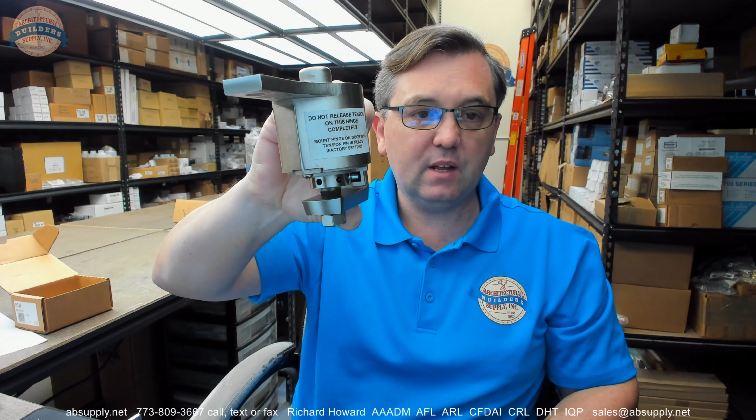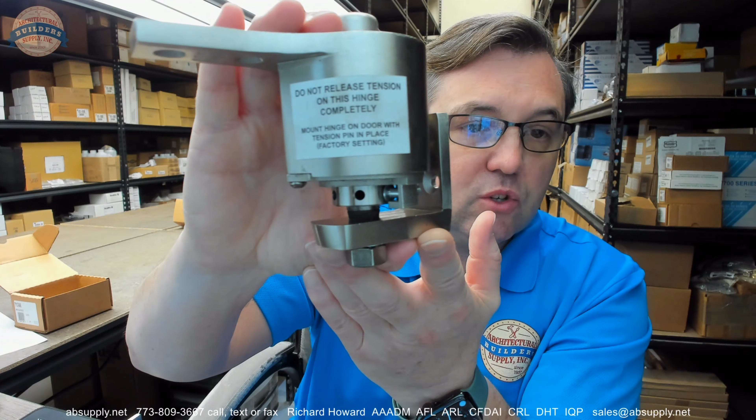The 7110 series from Bommer is a particular unit in that you would be best served by just literally following the installation instructions. Don't alter anything unless it's specifically stated, because this unit already comes out ready for setting tension after it's installed. Do not release tension on this hinge completely. Mount the hinge on the door with the tension pin in place at the factory setting.

So let's go over some basic dimensional properties of this item, and then we're going to get into the extended description of the item, meaning the installation instructions. So overall height of the top portion, overall height of the bottom portion to the jamb, about 2 1/4 inches, and its width about 1 1/4 inches. The overall height of the unit from what's called the boss all the way down to the bottom of the unit appears to be about 4 3/8 of an inch.

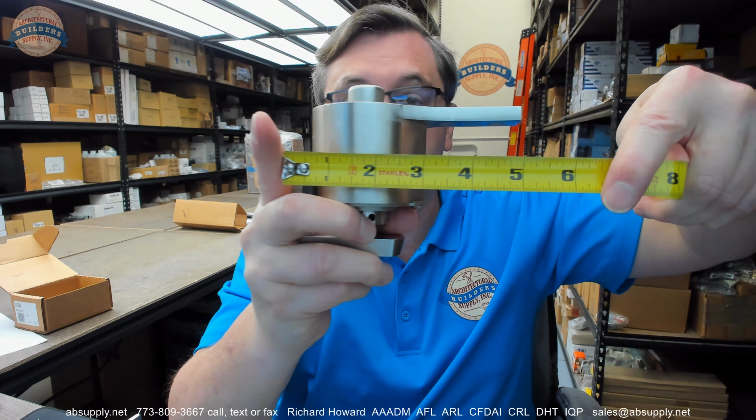So it's not small, plus it's not light—this weighs over 3.5 pounds. Overall width is about 5 1/4 or so.

The top pivot assembly overall is about 2.5 inches, with a width at about 1 1/4 inches. Up at the top it's a bit tapered, coming down to about 1 1/8 inches. Overall height is about 2 1/4.

Then we have our installation instructions, our screw package, and our tension wrench. Of course, we're going to need that tension wrench.

For every pivot that you order, there will be a tension wrench included. So let's take a look at the installation instructions. What we'll do now is switch to the screen view where we can go over these installation instructions together, step by step.

So this is the item we're working on, the 7112 in a 646 finish. We're going to look at the template, the installation instructions, then the product catalog. By the time you're seeing this video, there will be a link here called product catalog.

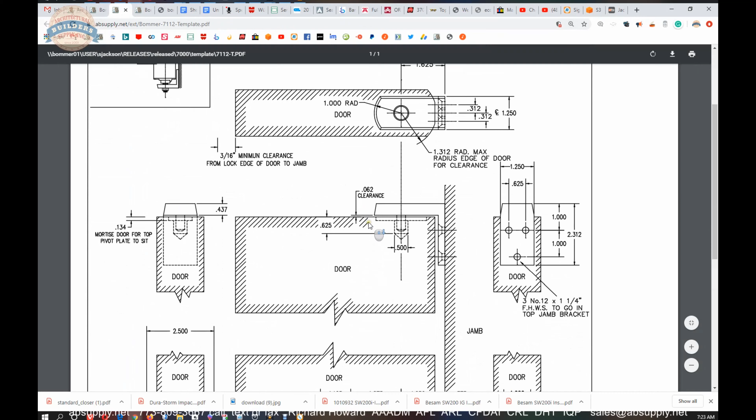But first, the template. This will give you the dimensional properties of the item, but also the dimensions in terms of how you are to prepare the door.

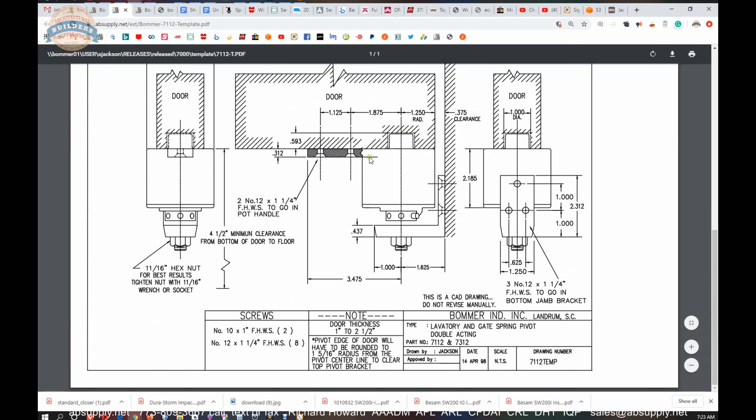The 7110 is different than the 7120 in the sense that the 7110 is surface mounted down here. They also have a model intended to be mortised into the bottom of the door, where you'll make a very large preparation in the bottom of the door to accommodate the body.

I've seen it both ways installed, but the surface mount version, the 7112, is simply more common. Not sure why, other than there's less work to do on your door in terms of prepping it.

Plus, if you're going to take a standard particle board door and cut that whole section out of it, that's not going to be considered proper door construction for it to work. So that's probably why you see it that way.

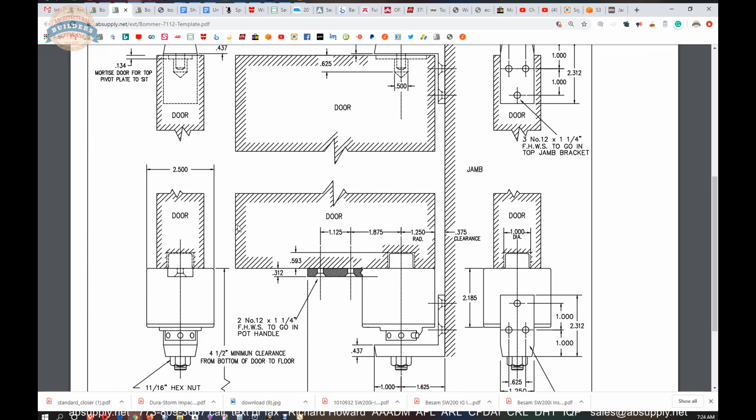So in terms of installation instructions, here's a really great overview. What they're showing is that the vertical line of pivoting needs to be completely plumb. That's a reference to the center line of the top pivot.

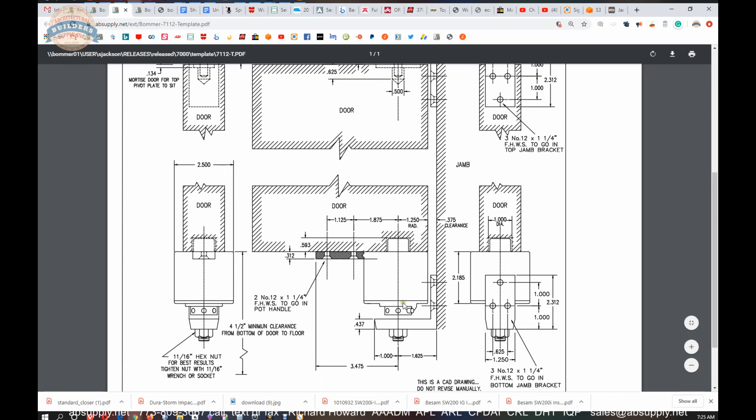All the way down through the center line of the boss and all the way down through the unit, that needs to be perfectly plumb. And it is, of course, when you install this material per the template. They're giving us the dimensions of the hardware we've already touched on for the top and bottom of the portion.

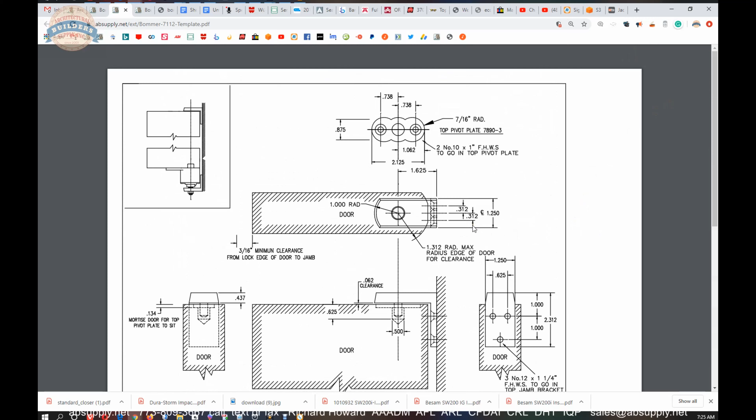Now, what we have not really discussed is this radius that they are requiring on the edge of the door - a 1 5/16 maximum radius on the edge of the door for clearance.

That makes for a really large roundover bit - a 2 5/8 diameter roundover bit. So you need to put a radius on the edge of the door with a maximum radius of 1 5/16. That needs to be rounded over.

I've had people that have used 3/4 inch radius roundover bits. You need to break that edge, is what they're saying, and it cannot be any greater a radius than 1 5/16.

So there's a small amount of flexibility there. The issue is this does require having a roundover bit. And if you do enough of this work, you'll probably want to purchase the larger size bit, because that same sort of radius flows through the rest of the Bommer line when it comes to rounding over and putting a radius on both sides of the door.

If you think of the top row of tile in a bathroom that would have a bullnose on it, that would be a roundover. But when you do it on both sides of the door, it becomes a radiused door edge.

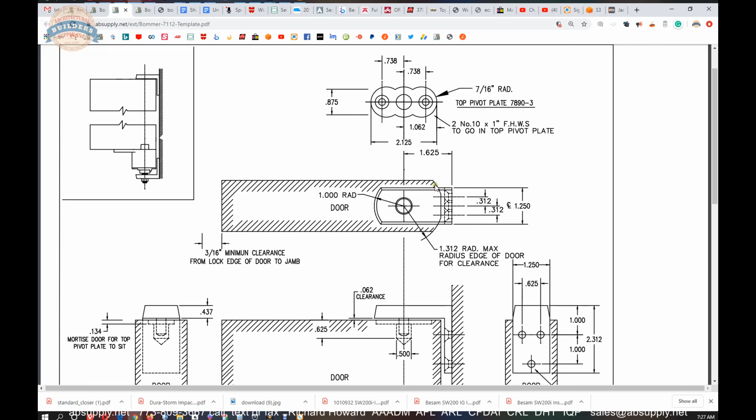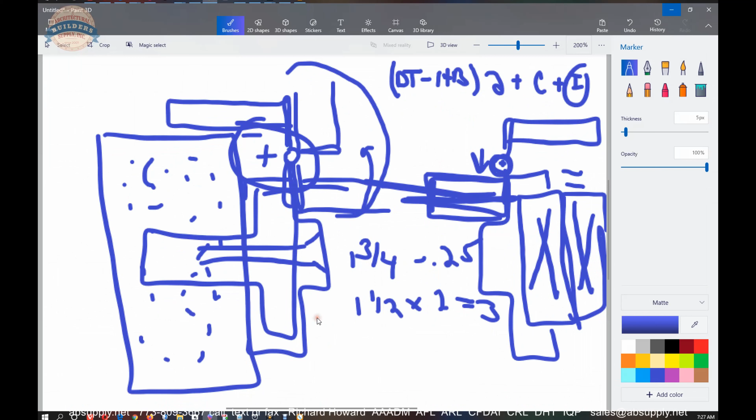Special consideration needs to be given to this as well. What I mean is, if you study or think about in your mind's eye just this one section here, you can easily run into a situation where you might have some unintended consequences.

If we were going to quickly replicate what our door looks like, we know that if this is a veneered door, you're going to have your veneer. You'll have 2 or 3 layers, cross-banding, and then a backer. You'll have these very different layers happening: veneer, cross-banding, and backer.

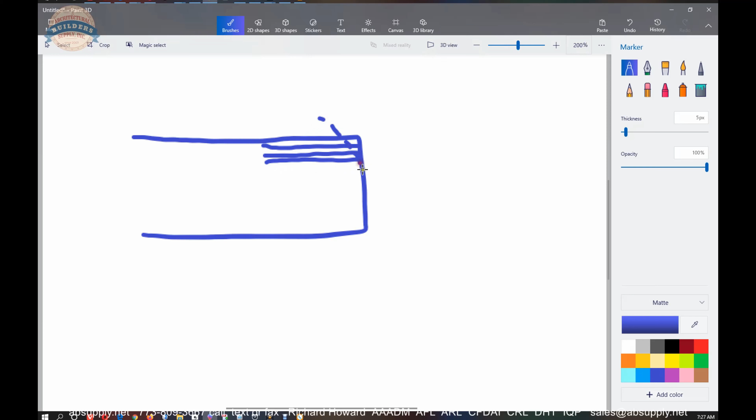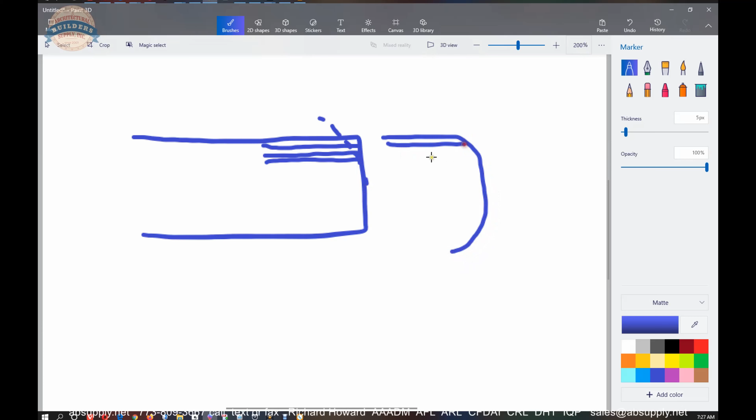Now, when you take a radius off the door, what you're really doing is accentuating what you're going to see as you radius through this. This area here and this area right here, you're accentuating how large that is, and you're going to see it. So if you take a solid core, birch, oak, cherry, whatever the veneer is, you're going to see the cross-banding and backer when you round that over.

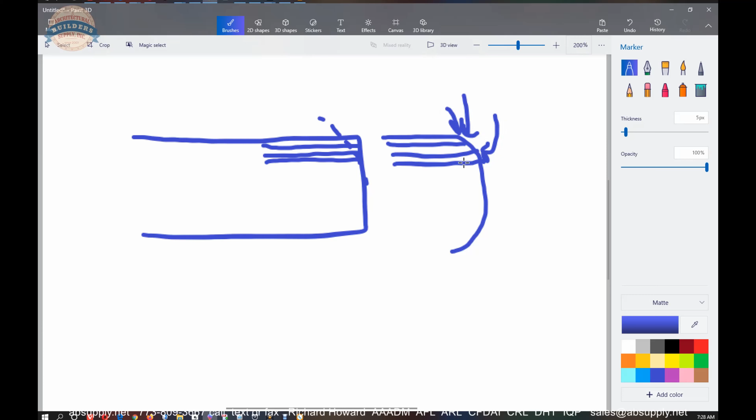Be mindful of that. If you're painting the door, you have no problem. But if this is cherry, you're not going to want to see these alternating dark bands on the edge of the door. And you'll have that in both scenarios, on both sides. So we need to be mindful of what that looks like.

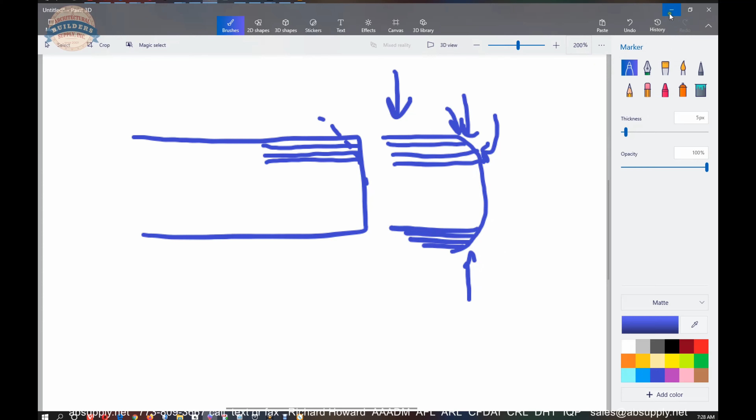As a woodworker, or if you're not, contending with that is what's necessary. Having a veneer that will wrap over and around would be a solution. But that needs to be thought through when you are just going to radius this.

Because doors are never solid. They can be, but doors are usually never solid lumber where you're going to radius through that and it will be graceful and beautiful. It's generally laminated construction that we're dealing with. So be mindful of that.

Putting a radius on the door is not difficult, you just need the right tool. I've always used a good size router bit for doing that — a 2.5 horse, large router. And I have a very large round over bit, I don't recall the exact diameter, it's 2.5 inch or something like that.

The base on my router I have literally modified — I cut it out so I could fit that giant bit down through there. I would set the depth so my bearing and carbide edge ends up putting me right in the center of the thickness of the door, giving a really nice, elegant round over on that preparation.

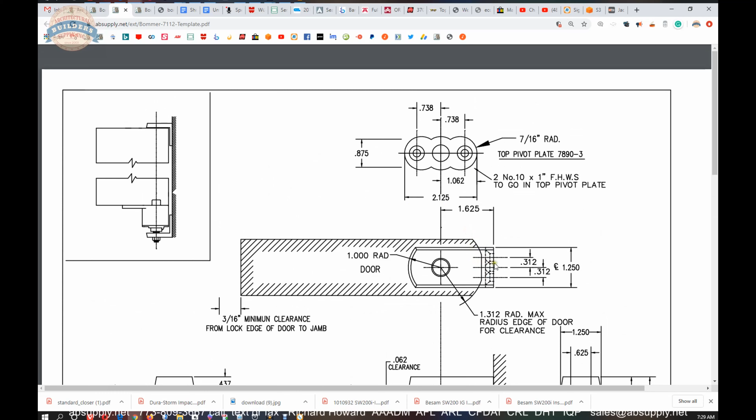I'll have the door down on sawhorses and run my radius down one edge, making only 2 passes. One is just to make the prep, and the second is to clear off any inconsistency. If you've tipped the router a bit, you don't want to rock it back and forth at all, because you will unintentionally route away material you don't want to remove.

A second pass is only for cleaning, and you want to make sure that when you get to the edge of the door, you exit straight off and not push back. You don't want to round over or take off any portion of this part of the door.

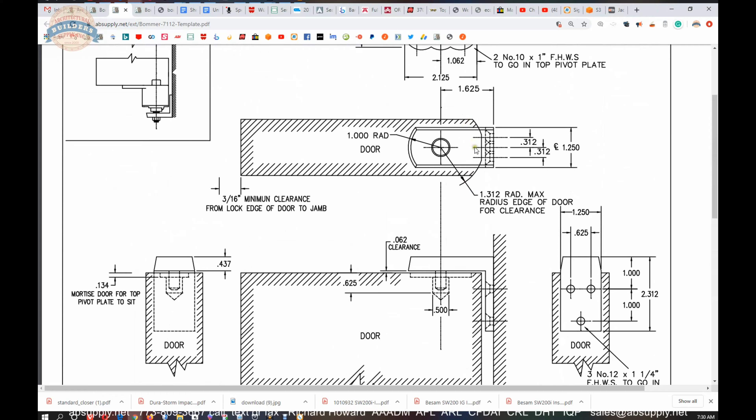Once you have a radius done on the edge of certainly your pivot stile, you don't have to do it on both sides of the door, although if you do, you will be able to have a tighter clearance, most certainly.

After you have the radius done on the pivot stile, you have to decide if you'll do it on the opposite end as well. If you have a 3/8 inch clearance on this side, what will you have on the opposite side? Do you want to design it so it's even, so the margin between the door and the jamb is even on both sides? You may want to make it symmetrical, so you'll undersize your door accordingly.

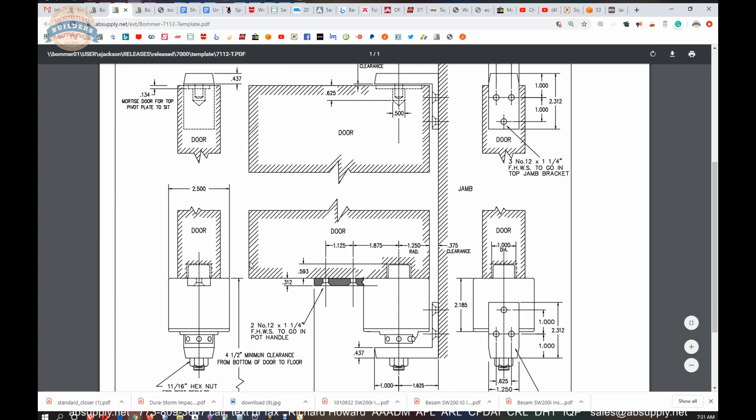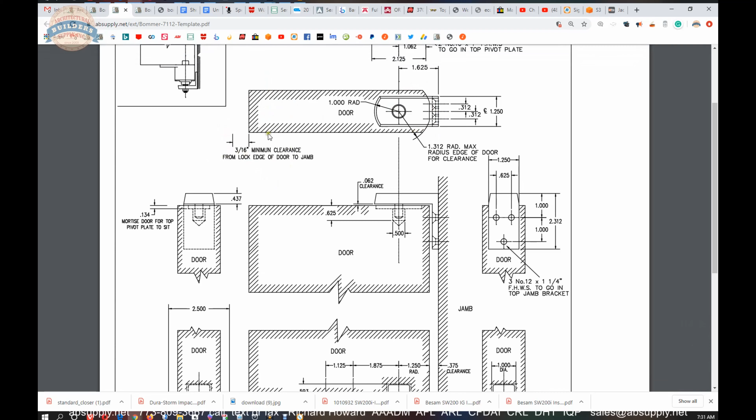Round over or don't — if you're going to leave a 3/8 clearance on your opposite stile, you won't need to round that over; that'll be plenty of clearance with a square edge door. Generally you're going to see them as square edge doors, exactly like this. 3/16 would be the minimum clearance to accommodate a square edge door. If you were to radius that door edge, 1/8 of an inch would be all you'd need. So you'll need to decide what you're going to do on that margin.

In terms of mortising the door, it's fairly easy at this point. You have nothing other than the preparation required in the top of the door for the plate as seen here, and you can see that that's 7/8 of an inch on the outside dimension.

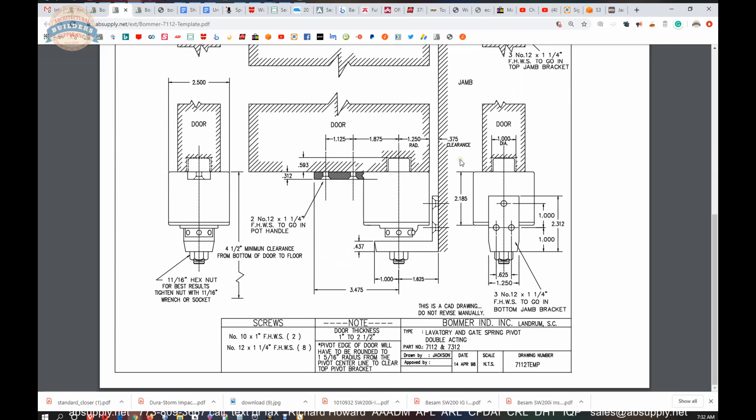If you were to take a Forstner bit and at these 3 points drill it the thickness of the plate, which is quite thin, at... must be here somewhere. The depth of that preparation is what I'm looking for. I don't see that, how thick that item is. Not meant to be surface mounted, that's for sure.

Well, that top portion is what's called a 7890, and we can do a search for 7890, and we're dealing only with this one portion here. But I do not see the thickness of that. Okay, so we obviously have it here, and I can put my caliper on it. I can tell you the thickness of the plate is 0.143, 143 thousandths thick.

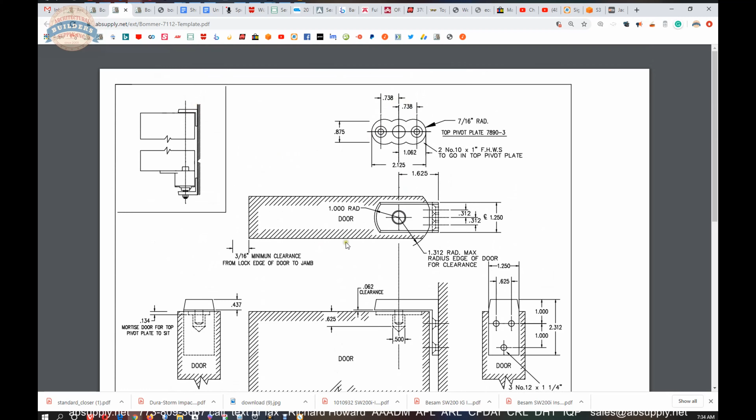If you were to make it 1/8 of an inch, or just marginally heavy on 1/8, your preparation would work well. Then they're going to want a 1/2 inch hole that's going to be drilled, 5/8 deep for that pin to come down, which is in the top portion of the pivot. That's the only preparation at the top of the door.

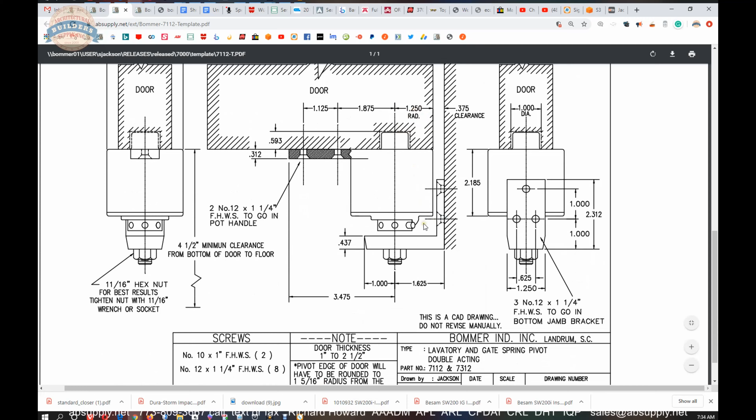The bottom of the door just requires this prep for the boss in it, inch and a quarter from the edge of the door to the center line, and then 1 inch diameter, apparently, is what that is, down in the center of the door. So from the edge of the door over to the center of that prep for the boss, which will be 1 inch diameter, is inch and a quarter from the edge of the door. And other than that, there's nothing else to do to prep this door, because it's a surface mount model.

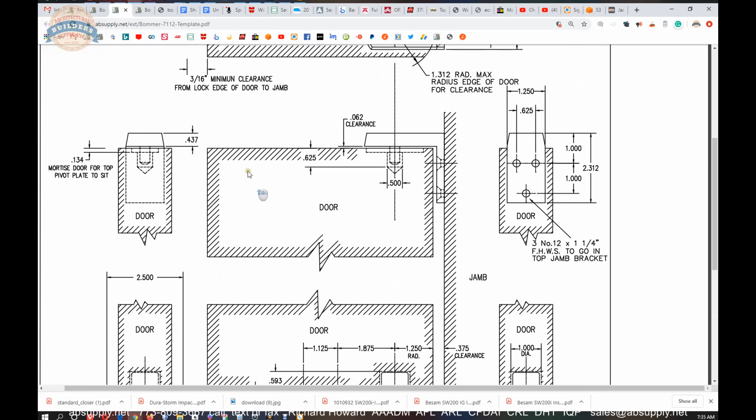So that pretty much wraps up talking about how to prep the door. In terms of the height, that's obviously whatever you're going to make the height is what that will end up being. We've talked about how to account for the width of the door. You'll need 3/8 here, and you're going to need at least 3/16 here with a square edge door. You might make it 3/8 as well, or you might radius both stiles of the door and make it a little bit tighter over here. But again, square edge is pretty common for what I see.

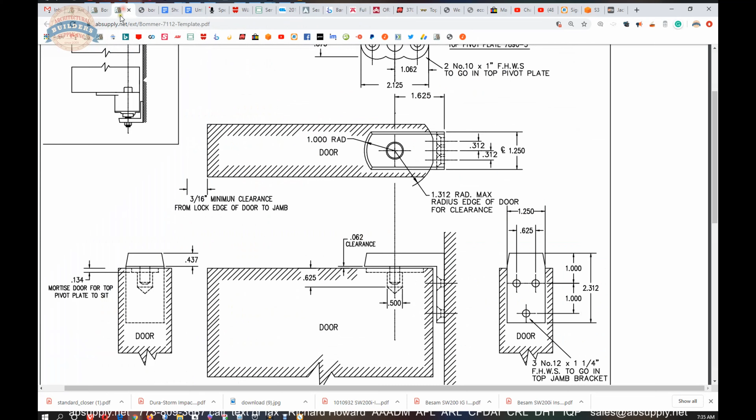Now, back to the item that we're working on. We'll get to the instructions, but first, let's jump over to the product catalog. We can find that, currently, the link to the manufacturer's page, that will allow us to click on the product catalog here. And when that document comes up, what you can do is perform a find function on the keyboard for 7112, and you'll get to the page where that can be located.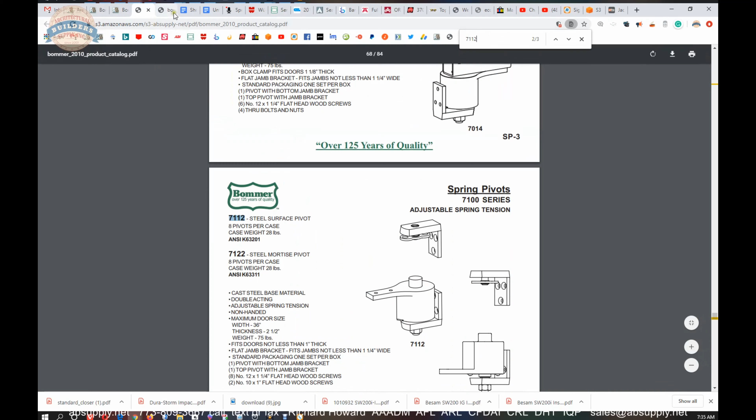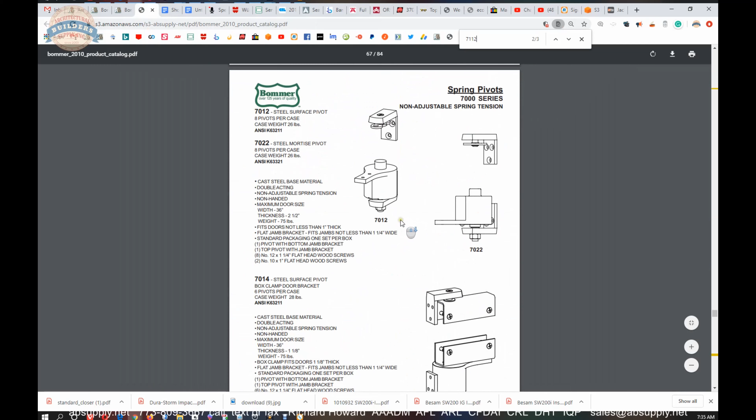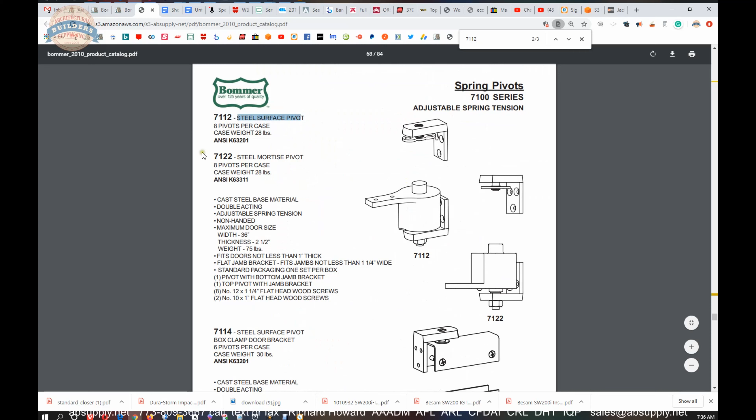Gives you an overview of these pivots. So the 7100 series is a surface mount. Okay, they have a 7112 steel surface version, and they have the 7122, which is the mortise version. They are non-handed, they are adjustable spring tension, they are double acting, and they have a steel base material.

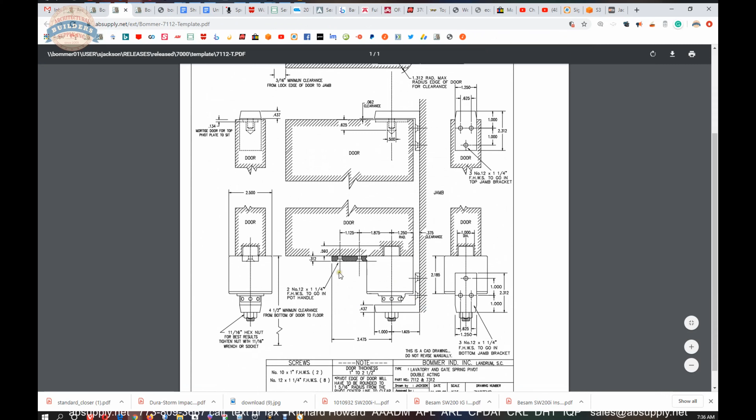3 foot width, 2.5 inch maximum thickness. A minimum door thickness, I would think you're going to want to be looking at how wide is the bottom plate, which they don't give us because it is surface mounted, how wide is that plate at the bottom, the tongue that the door sits on, and measuring it in front of me here.

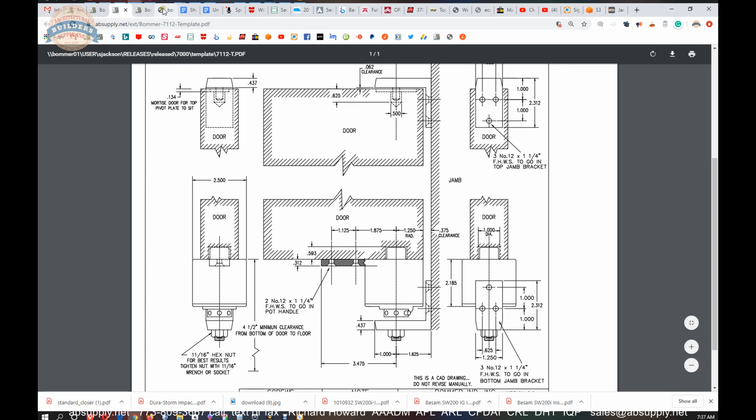It's less than an inch. So an 1 3/8 door is going to work on this. I don't think you're going to have a door that's thinner than that. So 1 3/8 to 2.5. Well, any door thickness is really going to work, but when they refer to thickness, they're talking about the diameter of this body. So just be mindful, how thick of something you're going to install is going to be related to that radius that you put on the door.

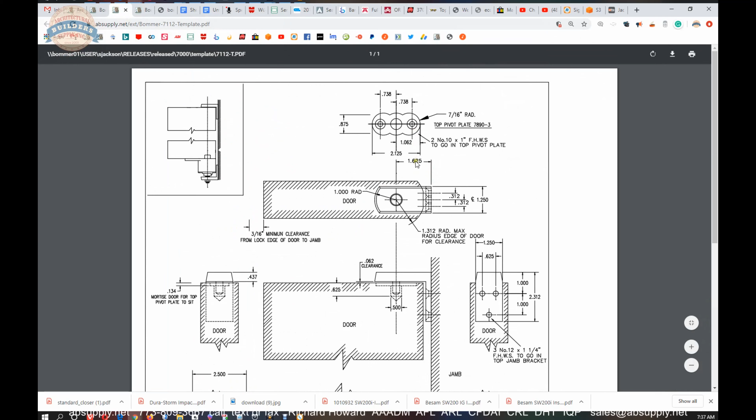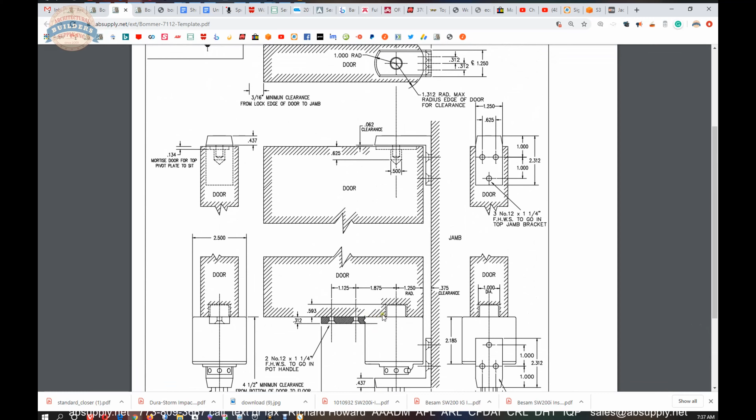They don't really give us a minimum and maximum door range, except here: door thickness, 1 inch to 2.5. It's one of those things where you're looking at the limitations of the hardware and realizing, okay, how thin can I stick something on here? Yeah, 1 inch does make sense, and you can go up to 2.5 inch to make that work as well.

Coincidentally, the outside diameter of that body is also 2.5, so that's probably where that dimension is coming from.

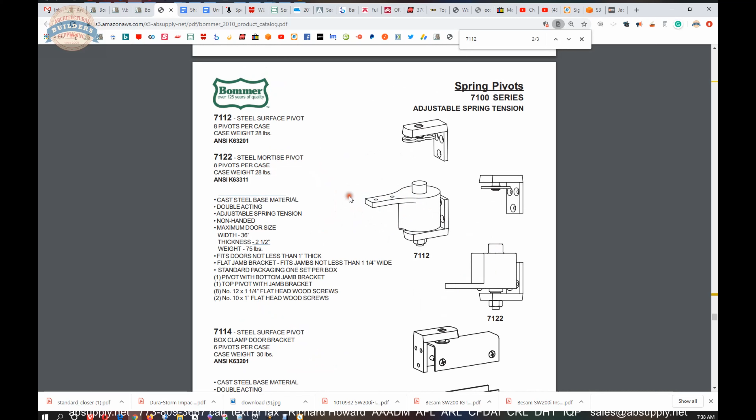They have a clamp style version, which I've seen used in the past. If you have a type of door construction that won't permit installation with screws coming from the bottom for a safe, proper installation, you can clamp this onto the edge of the door. They obviously need to know the thickness of the door specifically to manufacture those clamps.

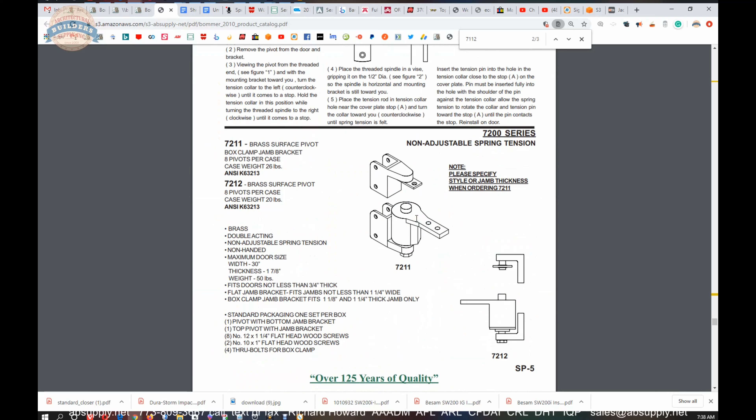Now, they make all of the same material... then they have this clamp style for the jamb as well. Then they make all the same material in a brass-based material, so they can do all of this in brass.

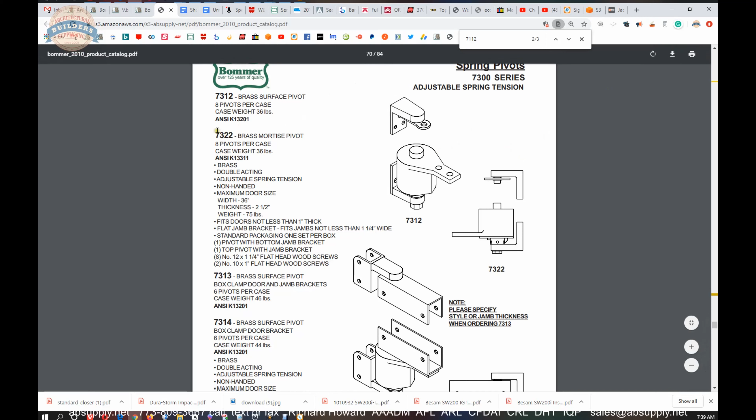The one we're specifically looking at is steel. So the difference is really only in what the material is made of, which will yield an end result when it comes to the finish that may be more in tune with what you require. So what I mean is satin nickel on a steel base material, such as the one we're working on, that finish code is 646. That will look different than a brass-based material in a satin nickel finish, which would be called 619. Depending on how important your finish requirement is, that will determine which model you use.

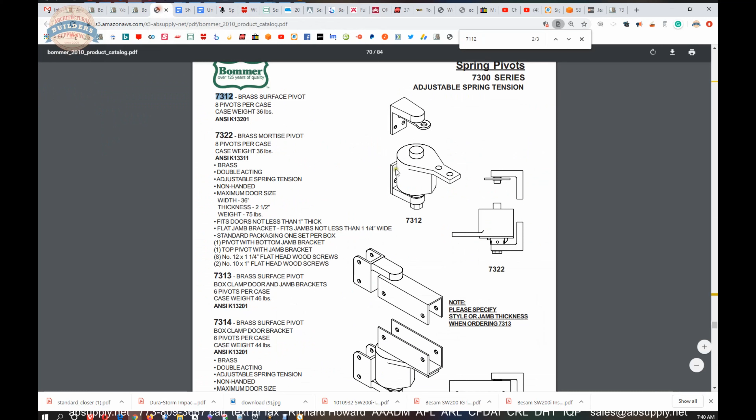7312 619 is going to be considered most certainly more expensive than our steel-based material. So that's really the other portion of this. It will certainly be more expensive, and the question is whether that additional upcharge of, let's say, 25% is worth the base material being an architectural material like brass, so you can get a true architectural finish on it, rather than a process done over steel.

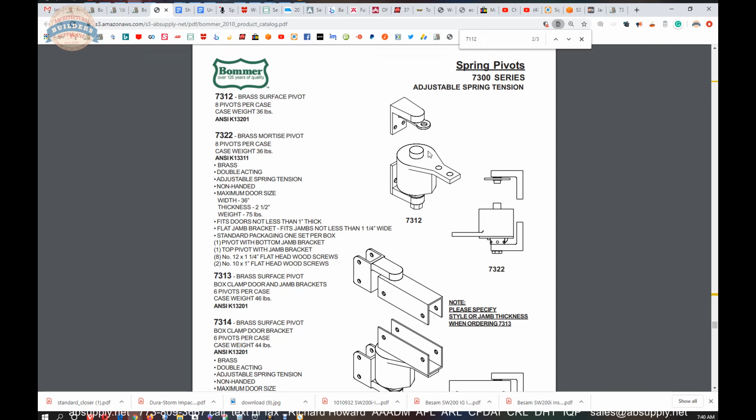Steel is more common, probably because it's simply less expensive, but that doesn't mean we don't sell the brass version, because we do. We sell both, and again, variations of this clamp material for clamping the door and the jamb. Just because we're here, the inexpensive gravity style pivots, the 7512 and the 7512H, can be done, and that's just gravity style, both hold open and non-hold open is what all that is.

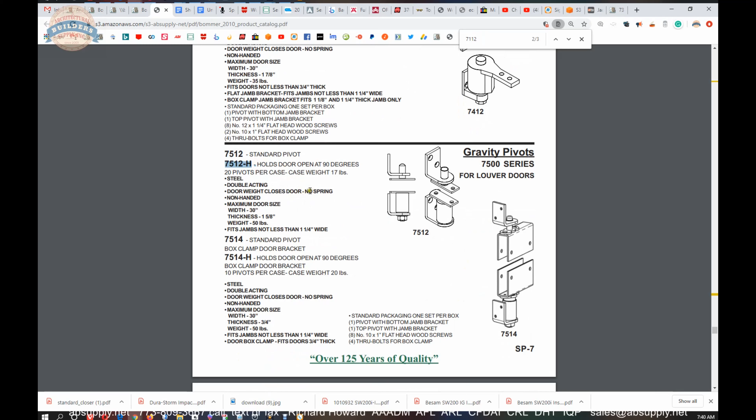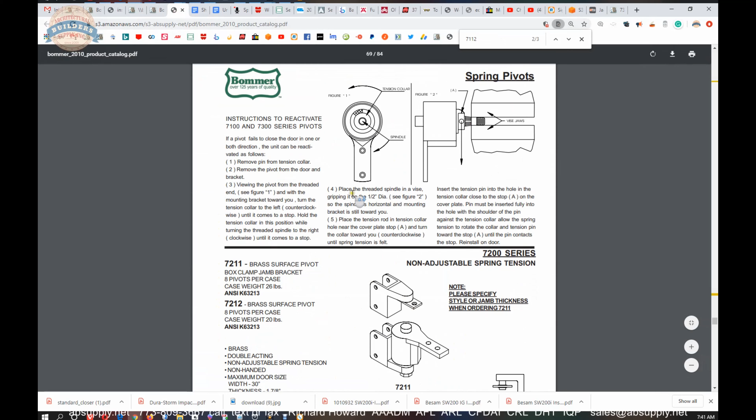Now, skipping over to the instructions, and I skipped back to the manufacturer's page. Hopefully you don't need to read this reactivation section. Generally, what happens when people need to reactivate their pivot is when they haven't followed the installation instructions exactly, and they've removed tension. So let's dive into the installation instructions, which are here.

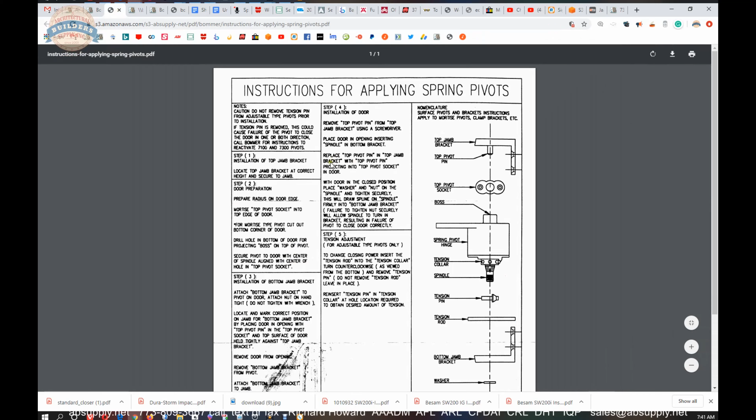As we move into the installation instructions portion, the bottom line is that whole reactivating of the bottom pivot -- if you don't remove the tension on this unit prior to installation, you won't need to look into that at all. Apparently, from what I gather, so many people adjust that tension immediately because they conclude, without looking at the installation instructions, that removing the tension needs to be done to install it. That's probably because with so many other Bommer products that are spring-loaded, you need to remove the tension to install them, okay? So in everyone's defense, that's why that's happening.

However, not with this style. So let's look at the installation instructions. Number one -- and I'm guilty of not reading the installation instructions initially all the time either. If it's a lock, I'm not reading the installation instructions. I've seen most manufacturers of locks, I've installed them, blah blah blah. However, every once in a while you try to put one back together and it just won't go, and when all else fails, read the installation instructions. Sometimes I learn something new, and that happened to me not too long ago.

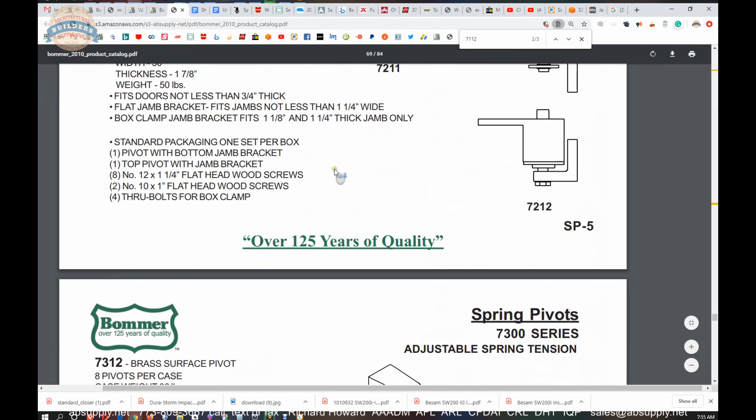Caution: do not remove the tension pin from adjustable type pivots prior to installation. If the tension pin is removed, this could cause failure of the pivot to close the door in one or both directions. Call Bommer for instructions to reactivate it, or just jump into the product catalog and get over to that page, which is page SP5, where you can see all of that. Okay.

Step 1, installation of top jamb bracket. Locate top jamb bracket at correct height and secure to the jamb. Put it in the center of your cased opening frame, would be my guess. But mark it, pre-drill the holes, and physically attach it.

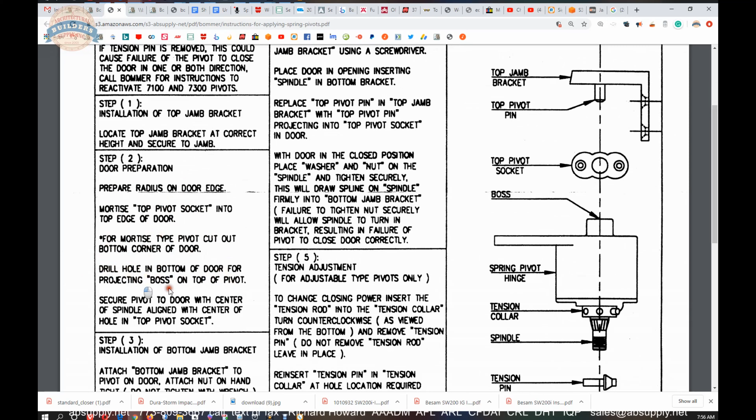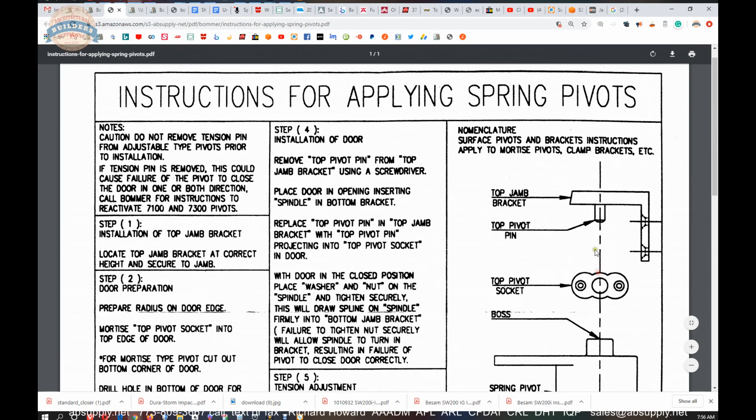So that needs to be, they're talking about this vertical axis of pivoting. That needs to be plumb, not only in an elevation view, but in a cross-section view as well. So if you looked at the door from the right side, it needs to be centered, or at least in the correct vertical axis.

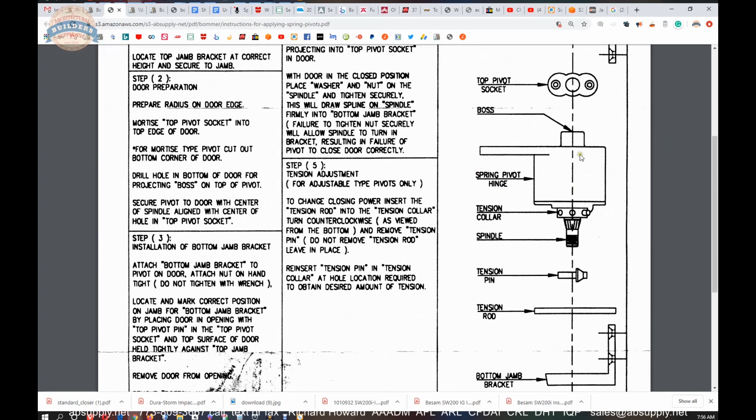Step 3, installation of bottom jamb bracket. So right now you have this attached to the jam. This you can attach to the door. You've done any mortising. That's number 1. Then you've attached this. You've attached this. Attach this, but you'll notice the bottom jam bracket at this moment is not attached, except that

at this moment you're now going to attach it. When it comes out of the box, this will be placed onto the bottom spindle with the washer and the nut, but very much only hand tight. It will be intentionally hand tight.

Attach the bottom jamb bracket to the pivot on door. Get this installed to the door. Get this installed down to the spindle with the washer and nut, but just tighten it so it doesn't fall off, and that it's hand tight only, and only 25% hand tight.

Locate and mark correct position. Attach bottom jam bracket to the pivot on door. Attach nut hand tight. Do not tighten with a wrench. Don't do that. Locate and mark correct position on jam for bottom jam bracket by placing door in the opening with the top pivot pin in the top pivot socket and top surface of door held tightly against top jam bracket.

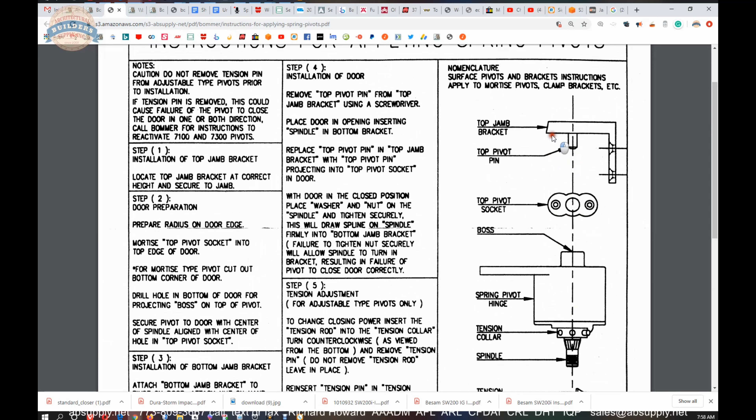So this gets installed onto the spring pivot. You're going to take the entire door, get it into the opening, and push the door tight against the top of this. And there's a reason why, which we'll go over in a moment.

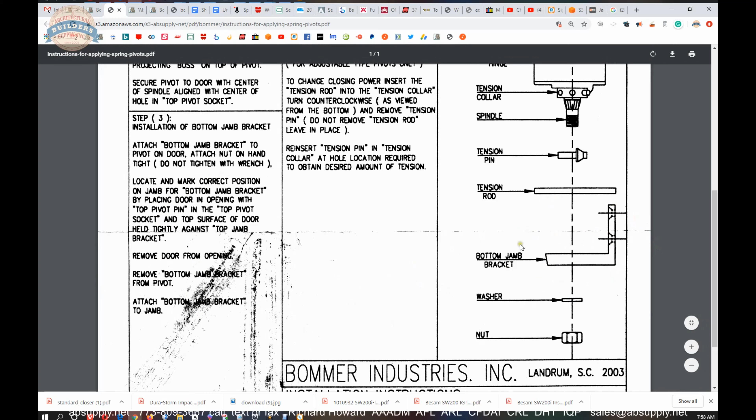You're going to locate and mark the jamb. Get it in the opening, locate and mark the jam. Remove the door from the opening. Take the bottom jam bracket off of the pivot, and then attach the bottom jamb bracket to the jamb.

Now you're going to get the door into the opening. The first thing you need to do is to remove the top pivot pin, which is this, using a screwdriver. You can do that. That is threaded, and that will come out of your top pivot.

Place door in opening, inserting the spindle into the bottom bracket. You'll have enough room to slide that door in there by getting the spindle into the hole in the bottom bracket. Then bringing that door into the opening. And then you're going to put the top pivot pin back down through the top pivot into the top pivot socket that's installed in the door. That's all this section here.

With the door in the closed position, place the washer and nut on the spindle and tighten securely. Before you do that, position the door exactly where you want it by lifting it slightly and positioning it so that it's completely centered, because there are splines here. When you place the washer and nut and tighten securely, you're going to draw the splines on the spindle into the bottom jamb bracket, permanently marking those with those splines. You will then tighten it securely. You'll use a wrench at this point.

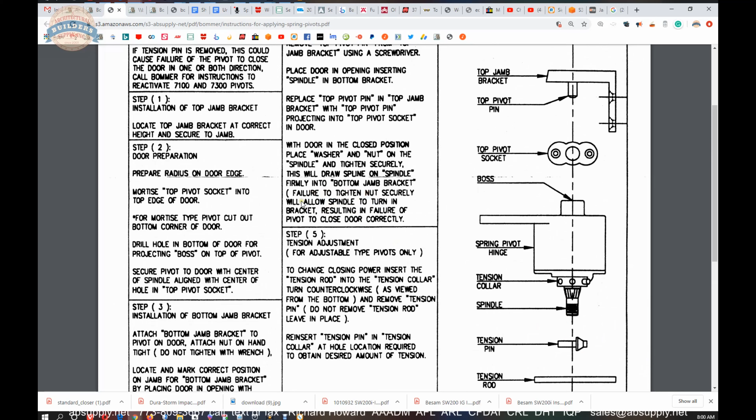And then your installation's done. So holding it tight to the top jamb bracket is important, because as you tighten this, you're going to draw that down, and then you're going to achieve that 1/16 of an inch margin that they call out right here. So you're going to pull that door down a little bit when you tighten it.

Now, assuming that you will need to adjust some tension to change the closing power, insert the tension rod into the tension collar. Turn counterclockwise when you're looking at it from the bottom up. What you'll do is remove the tension pin. Turn it counterclockwise slightly, remove the tension pin while holding the tension rod under tension. Turn that tension rod even further to reveal a new hole. Insert your tension pin. And that's how you adjust the tension.

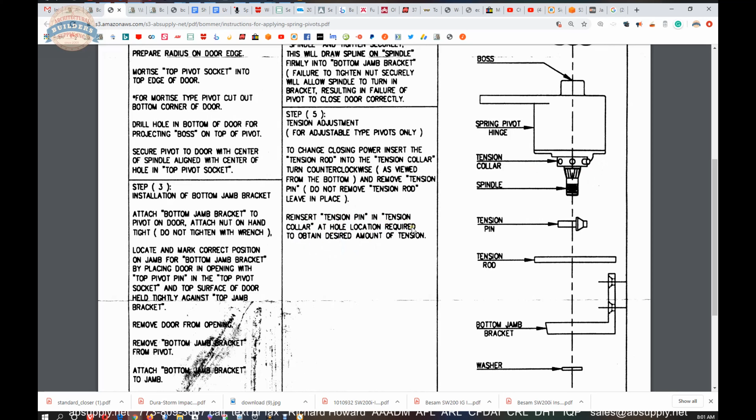Reinsert tension pin and tension collar at the hole location required to obtain the desired amount of tension. And then at that point, your installation is complete.

Now, if you were to begin an installation and skip all of this and remove that tension, you're very likely going to have to review the conversation here. Now, on how to reactivate that pivot, what we're looking at is if it's been removed.

If a pivot fails to close the door in one or both directions, the unit can be reactivated as follows. Remove the pin from the tension collar. Remove the pivot from the door and bracket.

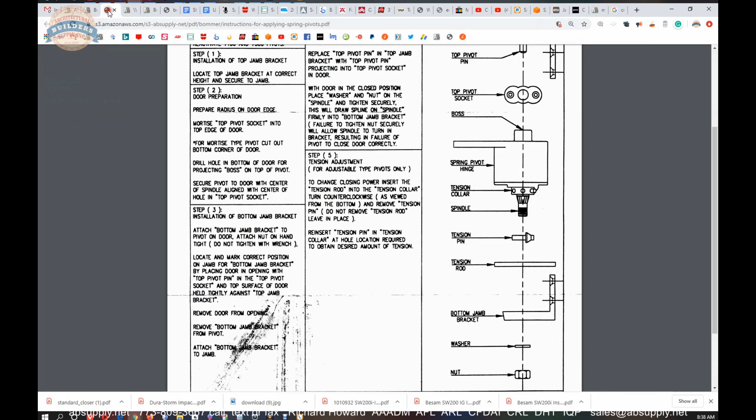So I would say what we're doing here is let's unscrew this, remove the nut and washer, lift it up and out, and you're probably going to have to tap that up with a mallet to get it up and out the way that it came in. I would be removing the top pin as well. Remove the top pivot, remove the pivot from the door and bracket.

Viewing the pivot from the threaded end from the bottom, see figure 1. And with the mounting bracket toward you, turn the tension collar to the left, counterclockwise, until it comes to a stop. Hold the tension collar in this position while turning the threaded spindle to the right, clockwise, until it stops.

What you're going to find is that there will be no tension on that material at that point once you have removed the tension pin.

Hold the tension collar in this position while turning the threaded spindle to the right until it comes to a stop. Place the threaded spindle in a vise, gripping it on the 1/2 inch diameter, figure 2, so the spindle is horizontal and mounting bracket is toward you. So at step 3, just to revisit this, viewing the pivot from the threaded end and with the mounting bracket toward you, turn the tension collar to the left or counterclockwise until it stops.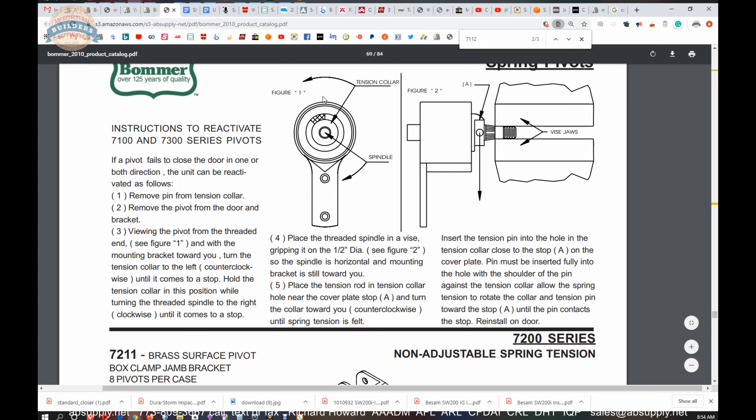So you have the pin removed. You're going to turn, with your hand, the tension collar counterclockwise. Then you're going to keep the tension collar between your thumb and forefinger, and rotate the spindle clockwise to the right until it comes to a stop. You'll find the center point. You can turn either of them past that point, but then you're increasing spring tension, so you'll just want to find where they naturally stop without turning it further, where it's obvious that it's going to come back to the position you just had it in.

Place the threaded spindle in a vise, gripping it on the 1/2-inch portion right here above. There's not much room there, it's like maybe 3/16 of an inch, but you'll get it onto a vise and you won't pinch the threads. Gripping it on the 1/2-inch portion so the spindle is horizontal and mounting bracket is still toward you.

Place the tension rod in the tension collar hole near the top cover plate. So right near the shoulder, that's where you're going to insert the tension rod. Turn it counterclockwise, or towards you, until spring tension is felt. Insert the tension pin into the hole in the tension collar close to the stop on the cover plate. The pin must be fully inserted into the hole with the shoulder of the pin against the tension collar to allow the spring tension to rotate the collar and tension pin towards the stop.

So, insert the tension pin into the hole in the tension collar close to the stop on the cover plate. You've got it rotated counterclockwise, you're holding it under tension, insert a pin. The pin must be inserted fully into the hole with the shoulder of the pin against the tension collar.

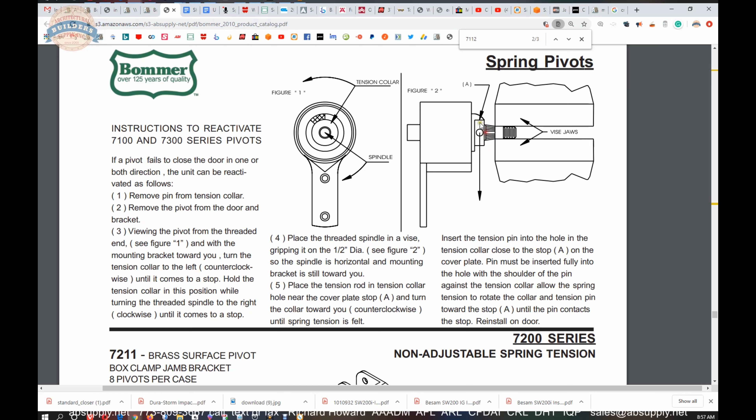Okay, that's the full description of what needs to happen. And then at that point, you're back to where you were. You have centered the tension collar counterclockwise and the spindle clockwise. You have put the spindle into a vise so that it can't turn. You're holding this with your hand so it can't turn. You're still at center. You increase tension and drop a pin. That's how that works.

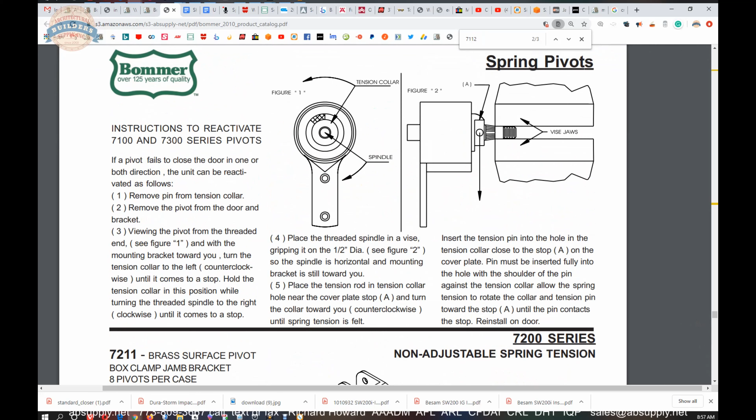And as you can see behind me, I've gone through the process of resetting that, reactivating the spring, because I will, after this, make a video on just how to do that. So, really fine quality item from Bommer. This is what the 646 satin nickel looks like on steel. Bommer has a logo down here on their item.

Just a great quality product. I'm smiling because I'm an unabashed fan of Bommer in all regards. I've been to the plant, and I was just recounting in my head a couple of my fun instances of being at the factory, enjoying time spent with them and learning, quite frankly, their process. And also recounting having been told Bommer's storied past. The brothers Bommer, in about 1877 or so, literally invented the entire concept of the spring hinge, cloned, copied, and duplicated countless times over the decades.

The name Bommer is quite synonymous with spring hinges in every possible variant. Of course, the ubiquitous double-acting spring hinge is a Bommer invention. That's the 3029, swings in and out. If you've been in a restaurant and that door goes in and out, it's probably a Bommer 3029 that's on there. They make single-acting spring hinges and then these funny derivatives of spring hinges as well.